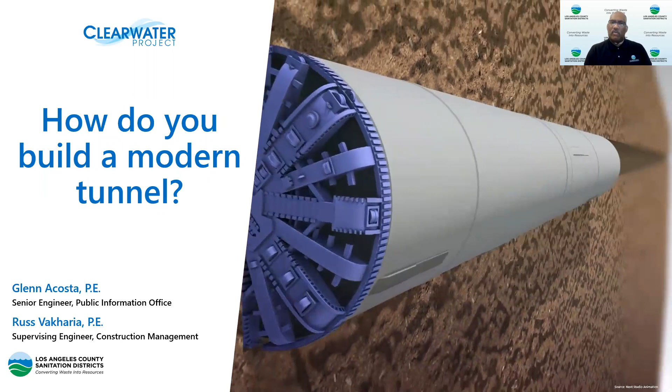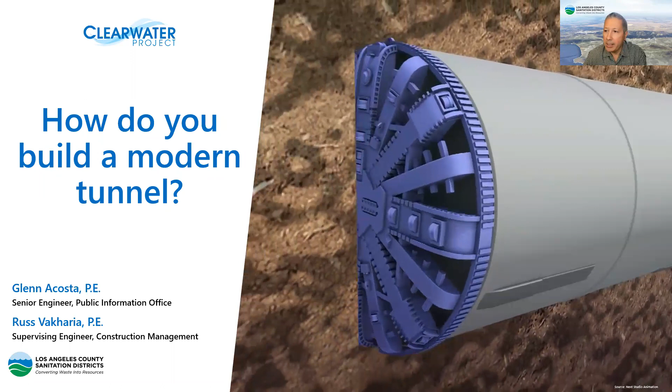Good morning, everyone. Thank you for joining us today for our presentation on how we build modern tunnels. Before I hand it off to my colleague, Russ Vakharia, who's overseeing the construction of the tunnel, I thought I would touch on who we are and why we're building a tunnel.

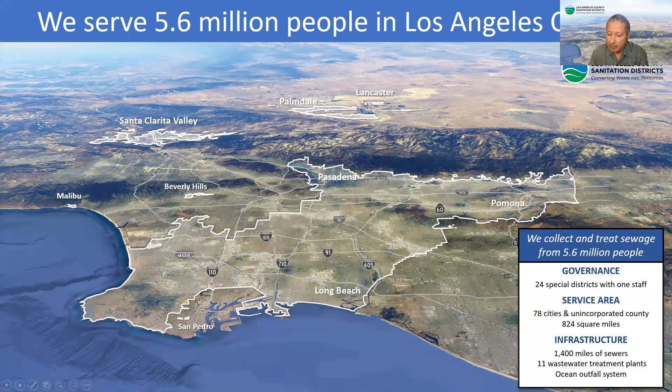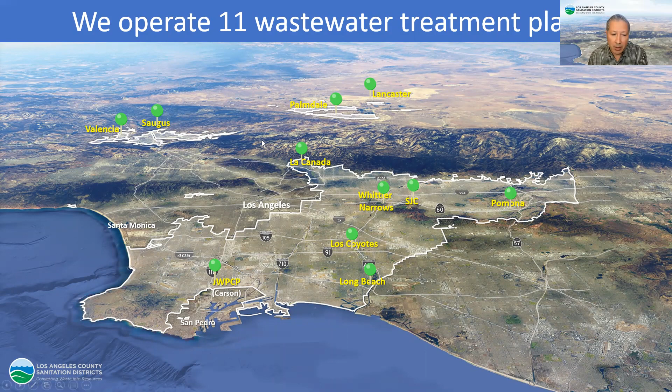Our agency, the Los Angeles County Sanitation Districts, manages the wastewater for over half the population in the county, 5.6 million people. Our service area goes from the South Bay all the way to the Antelope Valley. We manage the sewage by directing the flows to our 11 wastewater treatment plants, shown here in the green pins. Our largest plant is in Carson, called the Joint Water Pollution Control Plant. It is the hub of the main sewer system that serves the southern half of the county.

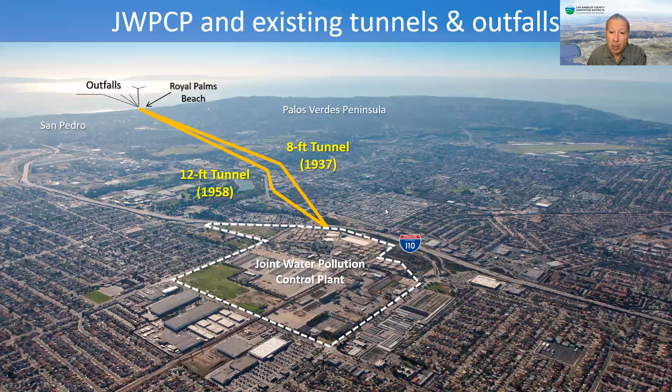Sewage flows into the plant, and in less than half a day, or 12 hours, it gets turned into clean water. That clean water goes out to the ocean through 2 tunnels that were built 60 and 80 years ago. These tunnels have never been taken out of service since they were built because there's always flow going through them, and they were not built to current seismic standards, even though they cross 2 earthquake faults.

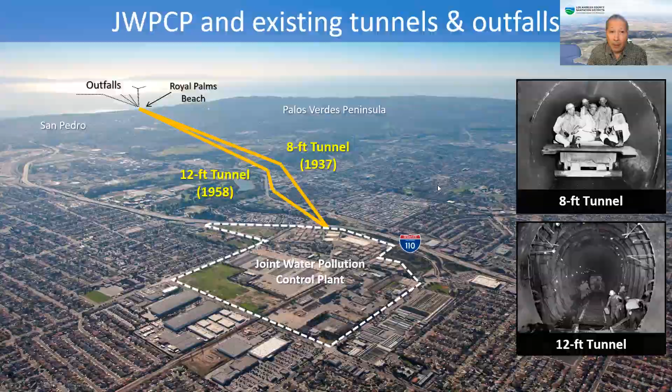The tunnels also have limited flow capacity, which comes into play when it rains across the LA basin. When it rains, rainwater gets into the sewer system, and the flows to the plant and through the tunnels can more than double. The last time we almost exceeded the capacity of the tunnels was back in 2017, when heavy storms hit the LA area.

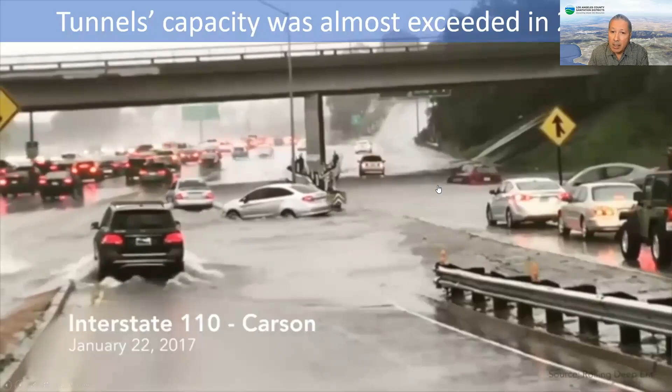So what would happen if the existing tunnels were to collapse or their flow capacity exceeded? Well, sewage would still flow into the plant, so we would have to find a way or a place for the treated wastewater to go, otherwise the plant would flood. And we can't allow the plant to flood because 5 million people and businesses across the county depend on this plant operating 24/7 without failure or interruption.

So to avoid the plant from flooding, we would have to release treated or partially treated wastewater into Machado Lake, which would impact the water quality.

Now, if that measure were not enough, we may have to go upstream and release raw sewage into the Dominguez Channel, which would flow into the LA Harbor and eventually to the surrounding beaches. Depending on the extent of damage, a collapse of the existing tunnels, and where it's located, this emergency discharge could last for weeks, months, or longer.

In keeping with our mission to protect public health and the environment, we're building a new tunnel so we can avoid that situation.

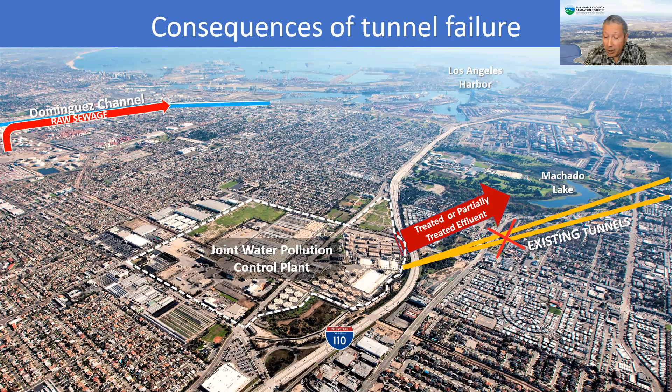So now to talk about how we're building the tunnel and where we are in construction is my colleague, Russ Vakharia.

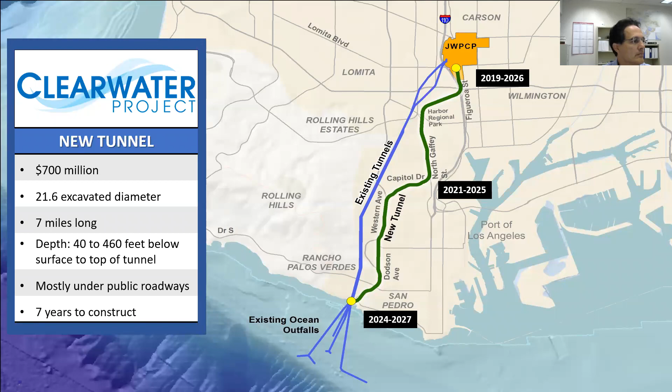Basically, the starting point for this tunnel is the tunnel shaft that we have, right on the border between Carson and Los Angeles. Here's an aerial view of the shaft area, and the tunnel machine was put down into this shaft and started tunneling in this direction.

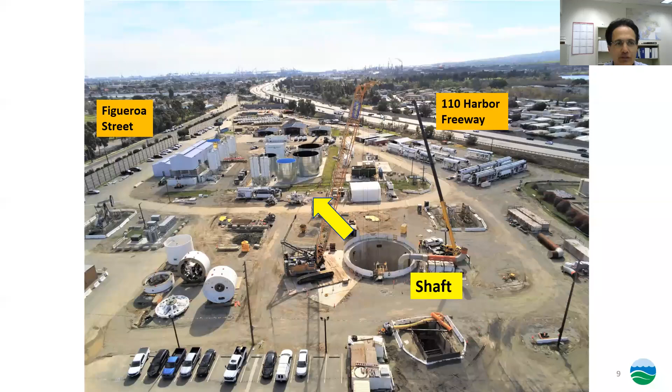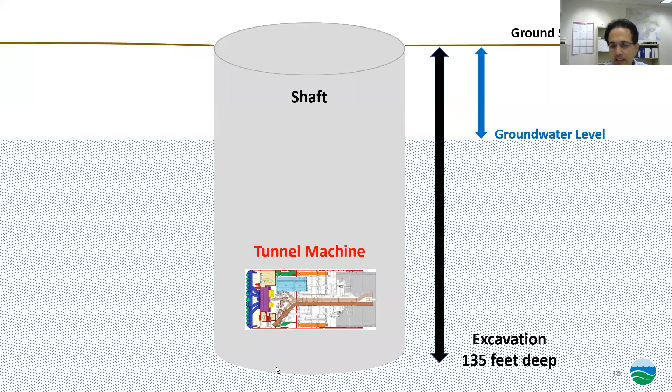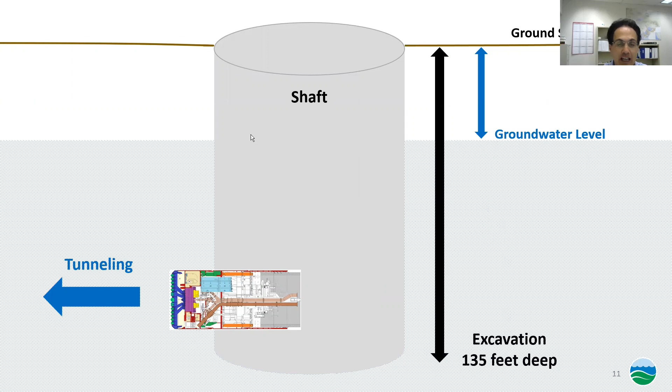Here you've got the Harbor Freeway and Figueroa Street. So again, the point of the shaft, and here's the ground surface we're talking about, and here's the shaft that was excavated some time back, is to place the tunnel machine down and start tunneling. As you can see, we're well under the groundwater level, which adds another level of complexity to this project.

So the route of the tunnel is basically going south out of the shaft onto Figueroa Street, then making a right turn, going through Harbor Park, under Machado Lake, up Gaffey, Capitol, and then Western. This shows the basic tunnel alignment, and you can see the streets that it goes through.

The first half of the tunnel is relatively shallower, 45 to 90 feet deep, plus or minus. The second half, where we go under the Palos Verdes Hills, is considerably deeper, up to 460 feet.

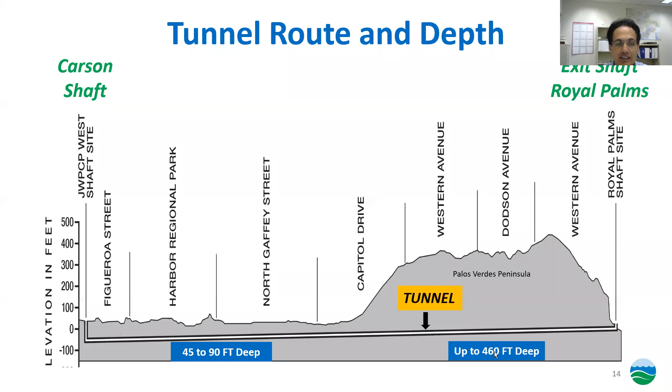The general tunnel machine, here's what the front of it looks like. It's about 21.6 feet in diameter. The whole head turns, and you've got various cutting tools here that help break up the material as it's tunneling.

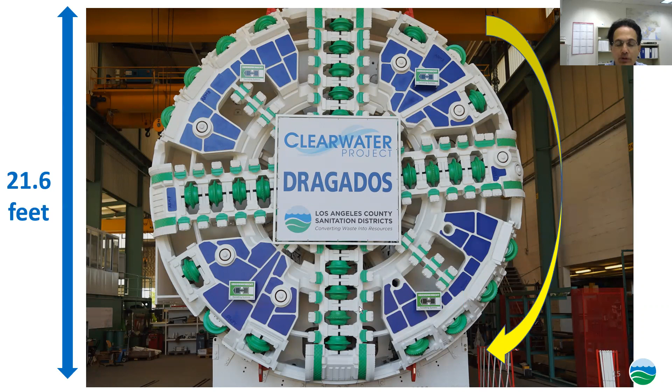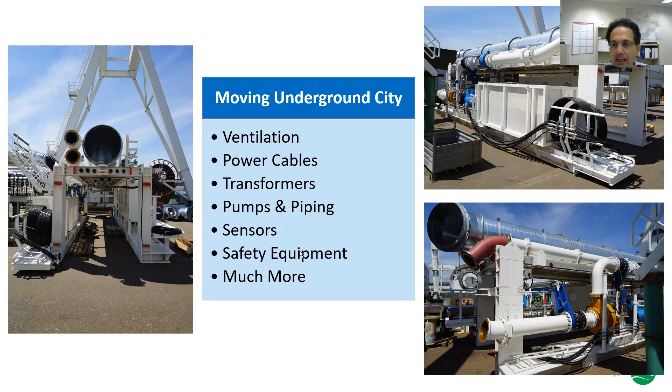Here's a picture of the tunnel machine. It was assembled in a factory in Germany where it was built. Here's the front of the tunnel machine, and here are the trailing gear pieces that it pulls behind. This trailing gear is made up of various pieces of equipment—it's like a moving underground city. It has to support the miners working in the tunnel machine and the entire tunneling operation, so it includes ventilation, power, transformers, pumps and piping, sensors, safety equipment, and much more. The front of the tunnel machine pulls all these pieces along behind it.

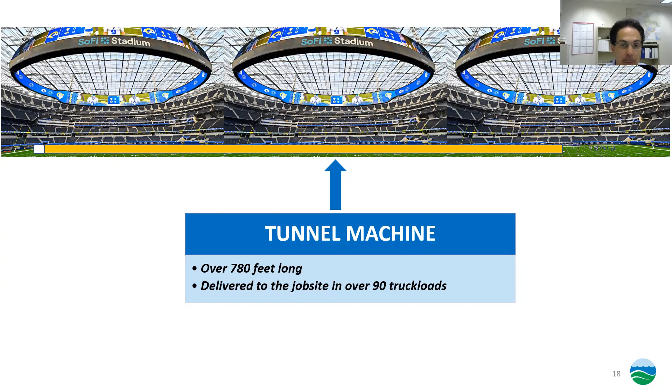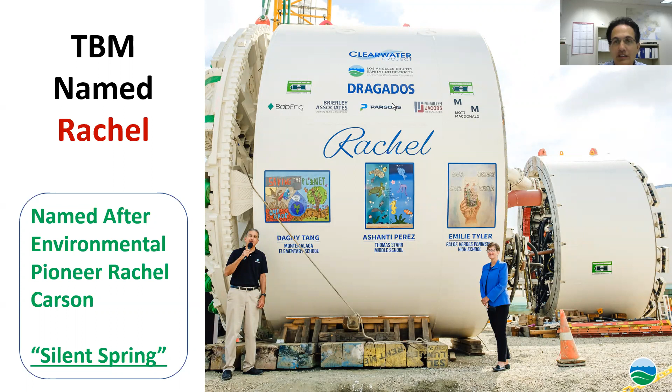The tunnel machine is named Rachel. We had an artwork and naming contest with the LA County Schools. It's named after Rachel Carson, an environmental pioneer who wrote the book Silent Spring back in the 60s. Here's the side of the tunnel machine—you see the name Rachel and some of the winning artwork from kids in local schools put on the side of the machine, along with the logos of some of the firms involved in this project.

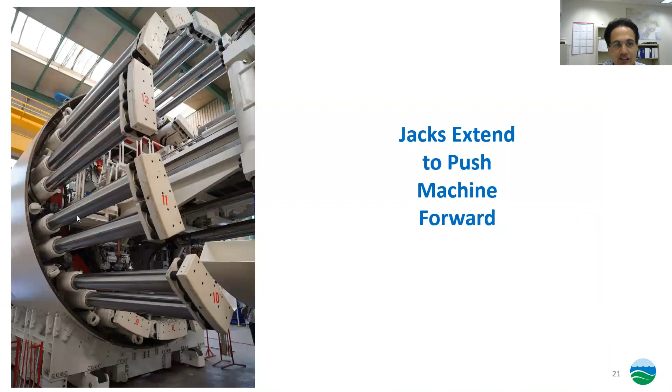So the way this tunnel machine moves forward is it's got 16 pairs of jacks, and these jacks are extended, and it pushes the tunnel machine forward. So here's a little basic animation as to how the tunnel machine works. The rotating head turns. The machine is pushed forward by these jacks who push against the last erected segment ring.

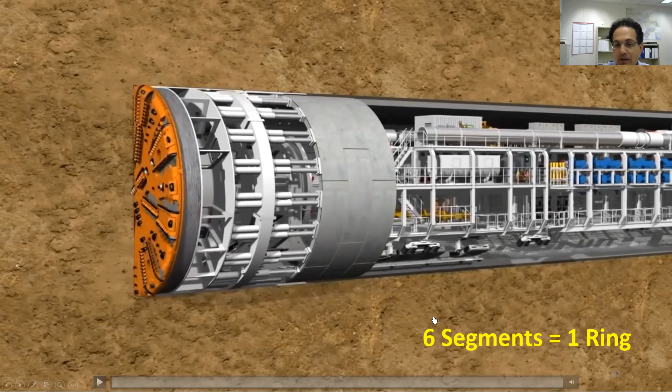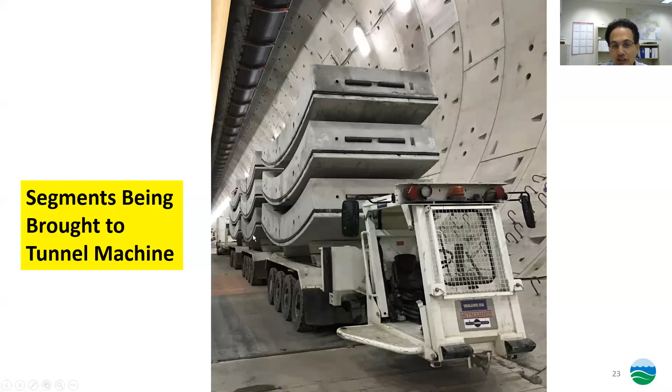So you see the jacks are pushing forward, then they retract, and then inside the tunnel machine, a new precast concrete ring is erected, and then the tunnel machine pushes forward on those. And that's sequentially how it's done. And each one of these rings is made up of 6 different concrete segments. These segments are produced in a plant in Palmdale. They're brought to the site, and then they're brought to the tunnel machine using rubber-tired vehicles like this.

In general, the way the tunnel machine works, and this is called a slurry TBM, is here's the outside, the dirt area, the tunnel machine's going from right to left. Here are the cutting tools. So there's a pressurized chamber here where a bentonite clay slurry mix is pumped in and kept under pressure. And this pressure is to equalize the external pressure so that you don't have any kind of ground movement.

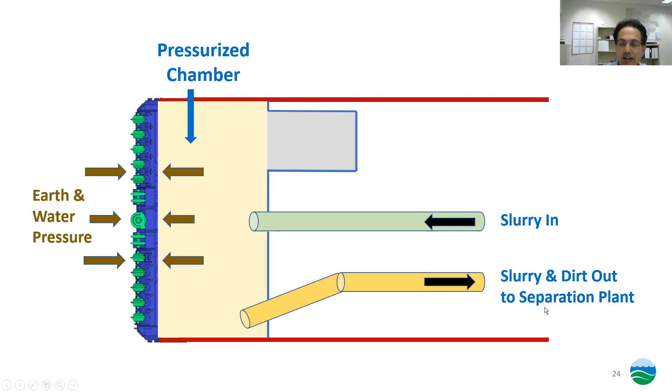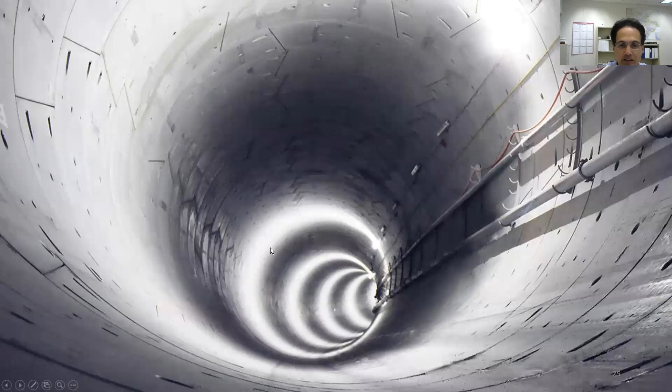And then as the tunnel machine digs, dirt comes into this pressurized chamber, and then a slurry and dirt mix is removed from pipes, and it's taken to a separation plant where the slurry is recycled and then pumped back in to use. So this is a picture of a similar tunnel, and this is what a tunnel looks like once it's constructed. And I'm going to show you some actual pictures of this job coming up.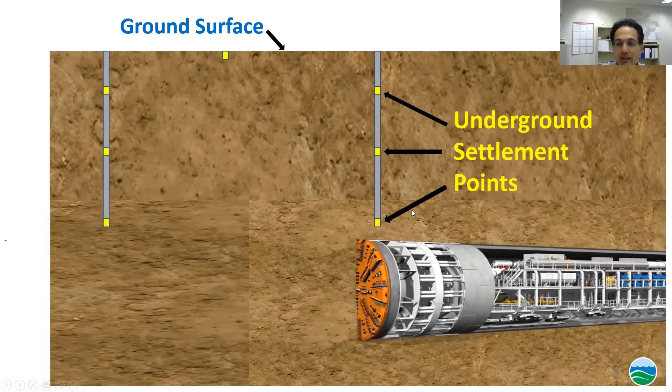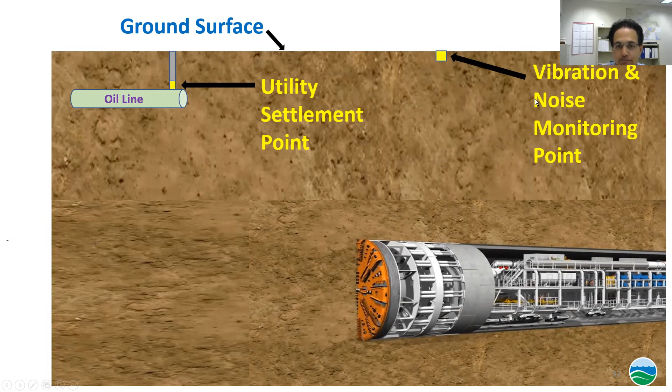So for example, this one, you see the 3 points in yellow, one's right above the machine, one is halfway up, and then you've got the third one. So we're monitoring these also in real time. So if there's any kind of movement, we get notification right away. We also have utility settlement points on critical utilities and vibration and noise monitoring points to monitor the machine. So we've got a series of these points, the underground points, the ground points, structure points, and all these are read wirelessly by these total stations.

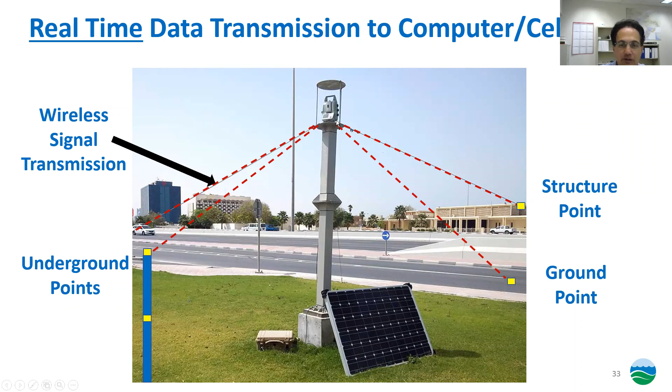And then the signals are sent directly to our cell phones so we can see exactly what's happening in real time. So this is an actual screen from my cell phone. And here you've got the tunnel shaft. This shows a graphic of the tunnel as it's been constructed. Here's a graphic of the tunnel machine. And these white points are the ground monitoring points. So we can see this in real time. I can see it on cell phone, computer, whatever. And all this data is transmitted in real time so we can see what's going on and make any adjustments as needed.

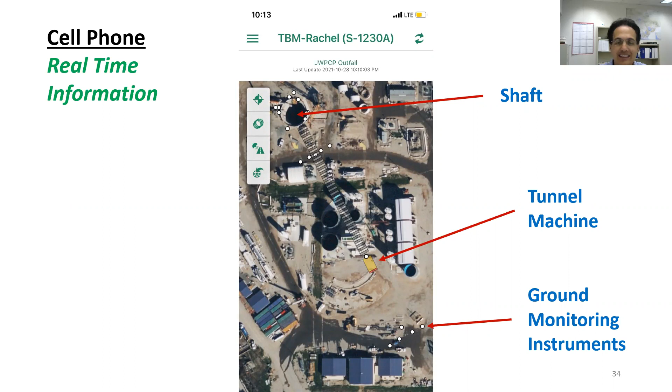The other thing, aside from monitoring the ground, is monitoring the tunnel machine itself while it's tunneling. So here's one of the screens that we have. Here's a cross section of the tunnel machine here. So I can look up here at any time and see, is the tunnel machine advancing, which means is it digging? Or is it building one of the concrete rings? Or is it waiting? And there are various other parameters we're watching also using this tunnel software.

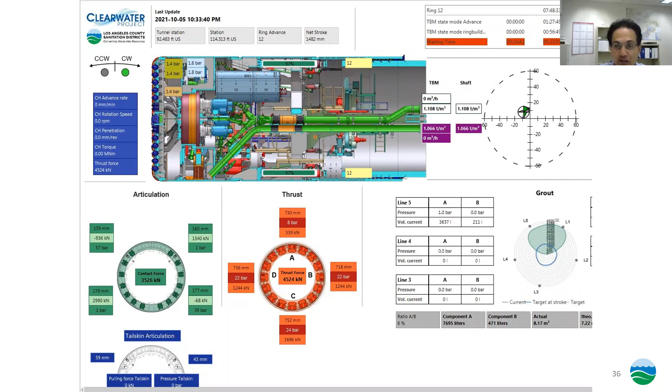So the contractor has access to this. We, the district, have access to this also. And again, this information is available constantly to us when the tunnel machine is operating. And the way this works is there's a fiber optic line that connects the tunnel machine to a computer server in our field office. And this is transmitted instantaneously to our cell phones and computers.

And all sorts of different parameters are being monitored, including the amount that's excavated, how much thrust force is being used, if the cutting tools are wearing, pressure, and more.

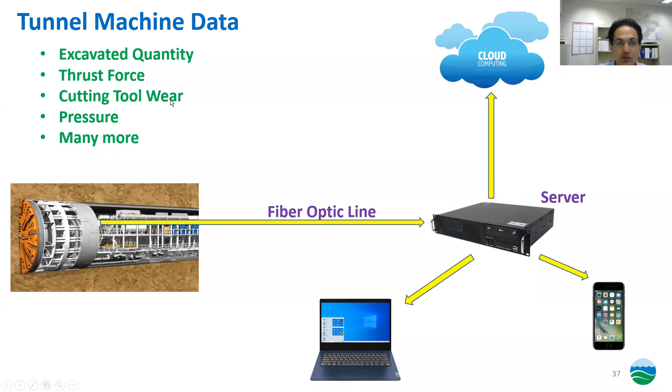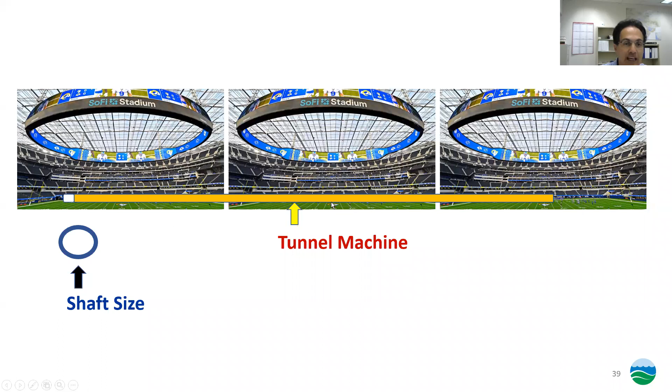So the first part of the tunneling is assembling the tunnel machine in the shaft. And again, as I mentioned, this tunnel machine is approximately this long. It's over 2.5 football fields long. The challenge is you've got to get this long a tunnel machine into this small a shaft. If you had a bigger shaft area, you could assemble the whole machine on the surface and put it down. But here you've got to put it together as you're tunneling.

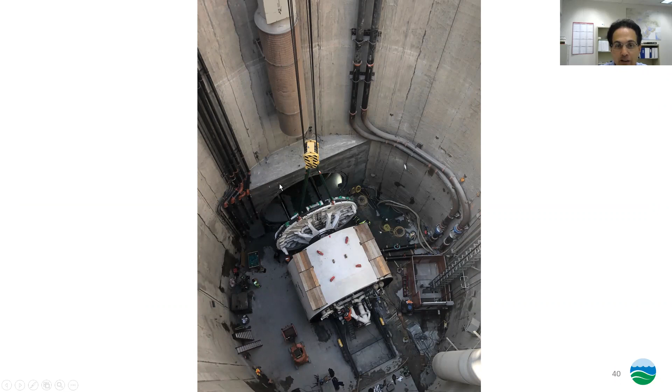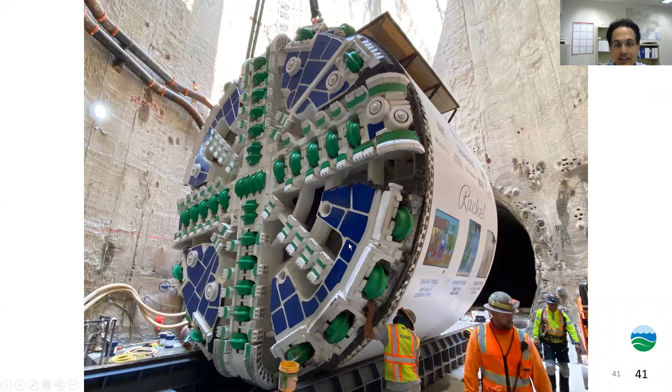So here's an actual picture that was taken some months ago. We're looking down into the tunnel shaft. Here's the front cutting head of the tunnel machine, and here's the second piece. You've got a short starter tunnel here. So basically, this is the tunnel machine down in the shaft, looking at it. Here's the cutting tool. You can see the name Rachel with the artwork here. And these are the tunnel miners getting ready to start the tunneling process.

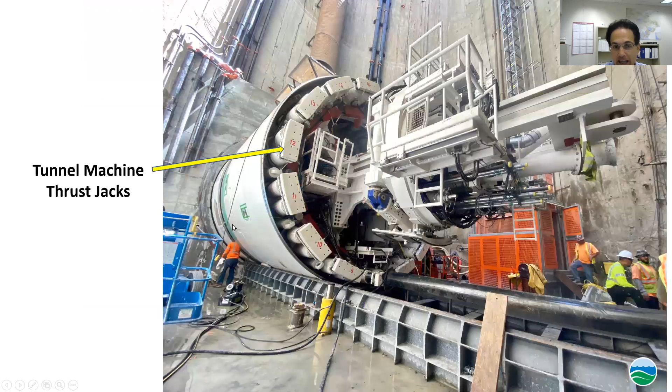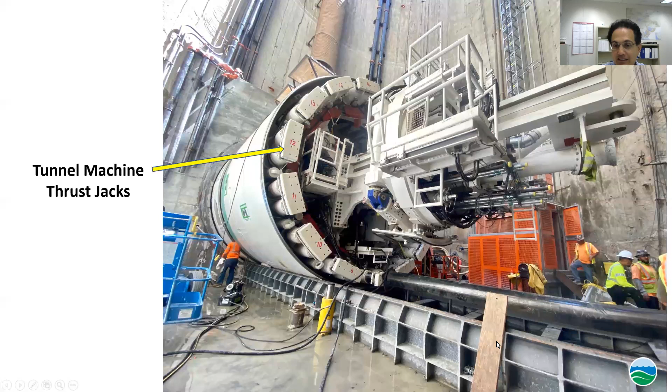And here we're looking at the tunnel machine from inside the starter tunnel. You've got these guide rails. So the tunnel miners get this machine into the starter tunnel and get it ready for mining. And here, the front of the tunnel machine's already been pushed into that starter tunnel. So you're looking at the rear of it. Here, we're inside the shaft. And here are the thrust jacks. Here's the guide rail. And this is when it was getting ready to start tunneling.

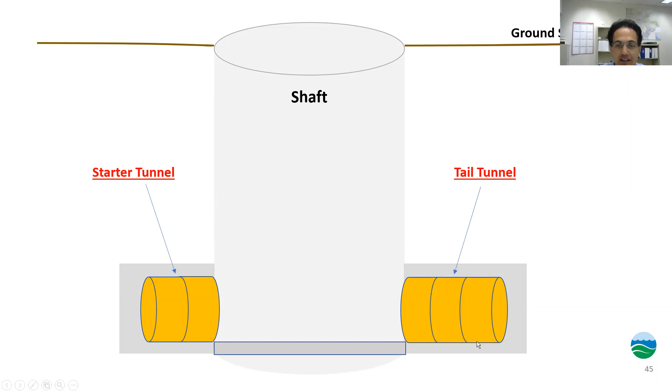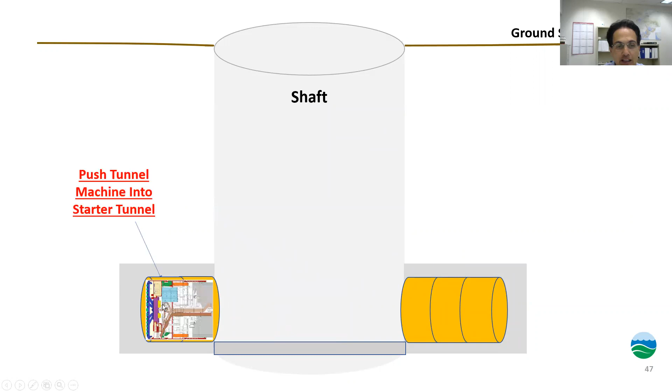So the launching of the tunnel machine, I'm going to show you a few graphics to show how it's done, because it's got to be done in pieces. So we have the shaft. Here's the ground surface on top. Here's the shaft. The contractor dug short starter and tail tunnels to logistically help launch and manage the tunnel machine. So the first part was lowering the front of the tunnel machine down, bolting it together, and then pushing it into the starter tunnel. Then they attached a piece of trailing gear behind it and bolted that together.

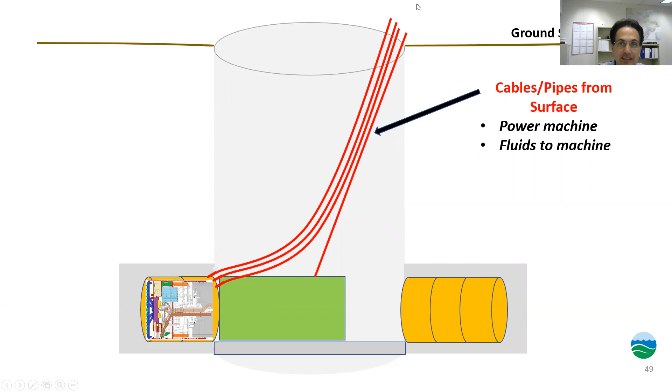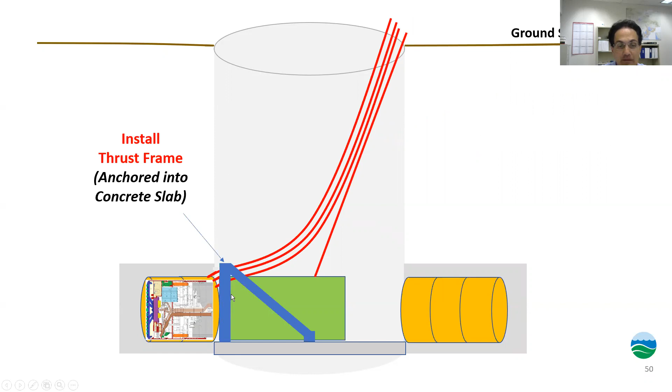And then they extended cables down from the surface, because in order for this machine to work, it's got to be connected to power, the slurry system, fluids, other things on the surface. And then the tunnel machine needs something to push off of. So a steel thrust frame was erected so that the tunnel machine can push off it and start tunneling. So the tunnel machine pushes off it, starts tunneling.

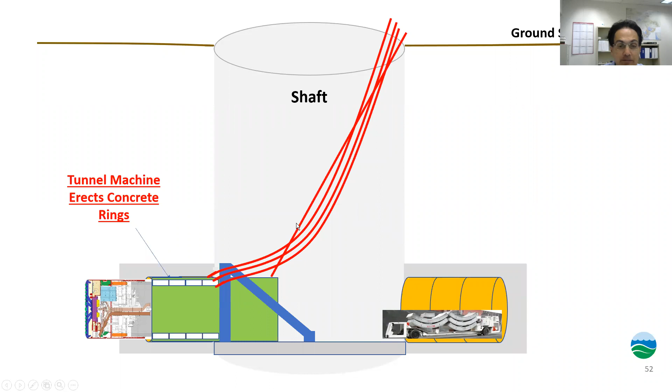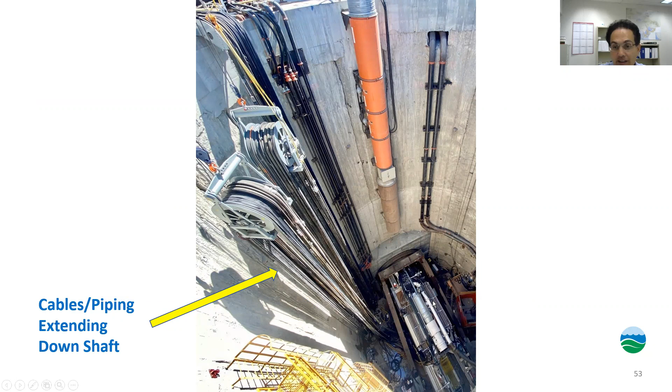So here's an actual picture that was taken several weeks ago. Here you see all the power cables, the pipelines and all going down to the machine. The head of the machine is already buried, and here's the first trailing gear piece. So this tunneling operation right now is being fed from the surface. Here's some other pictures from the shaft where you've got some tunnel miners. Some of these concrete segments are being lowered into the tunnel, and the miners get them ready to feed the tunnel machine.

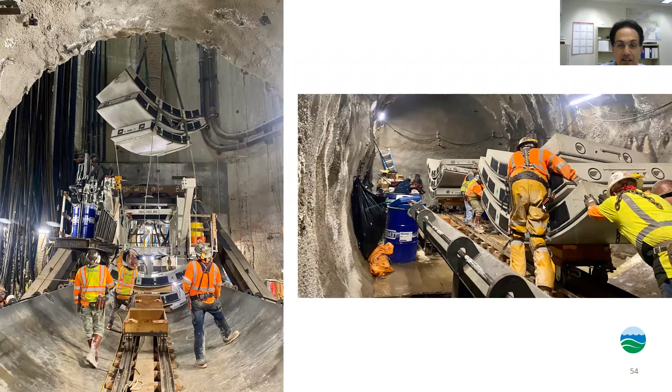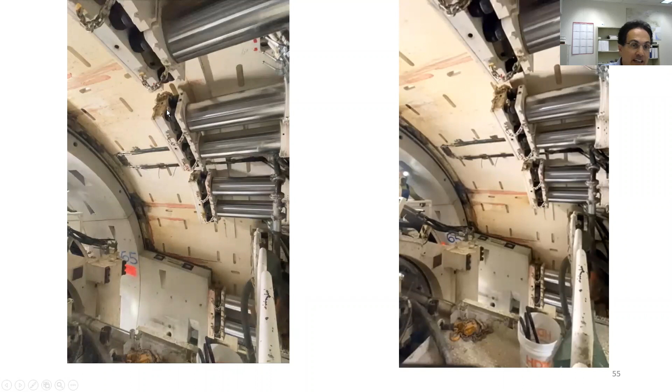On the left side here, this is an actual picture of inside the tunnel machine. So you can see that this ring has been erected. You see the different segments. Here's one segment, here's another one. And now a new ring is being erected here. And here are the thrust jacks. So the thrust jacks are extended back as this new ring is erected.

Here's a little video on the right that shows it. So you see the thrust jacks are pulling back, and now you see the tunnel machine arm raising up the next tunnel segment to put it into place.

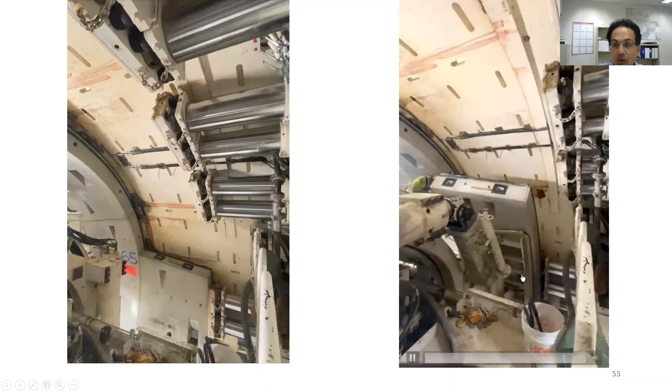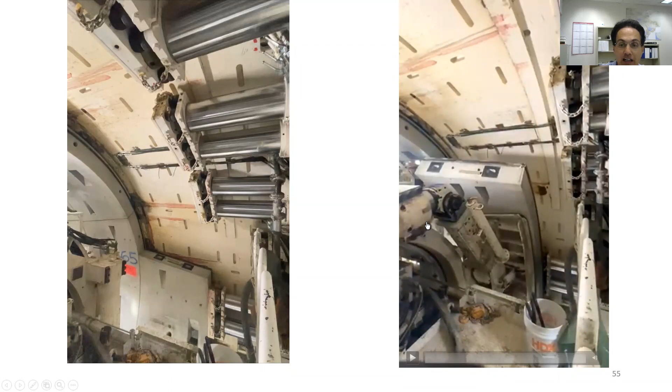And this is done sequentially by the tunnel machine as it moves forward. So once this ring is built, then these thrust jacks will press up against it and move forward. So these are, again, actual shots from the tunnel machine. And here's one of the tunnel miners bolting some of the segments together. The clearances inside the tunnel machine are very tight.

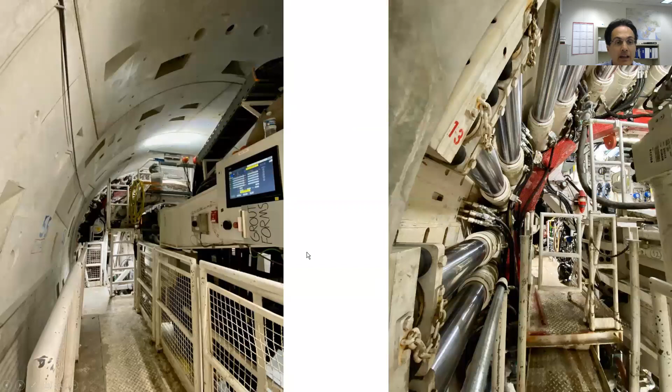And here's some additional pictures of the tunnel itself. So you've got the tunnel machine here. Here are some of the segments that have been erected in the tunnel as it's moving forward. And you see that after a segment is erected, these thrust jacks push up against the last erected segment and push the tunnel machine forward.

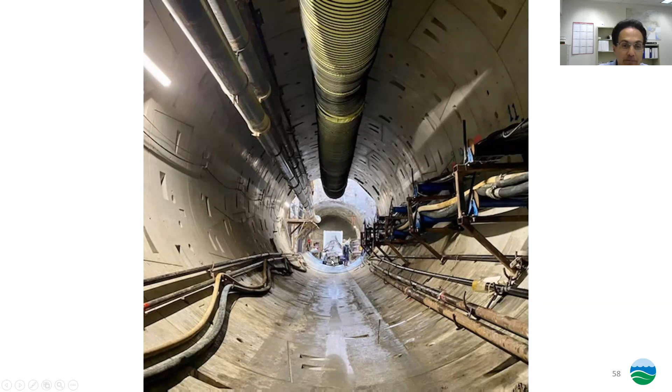And here's a picture of a portion of the tunnel that's already been excavated. We've gone over 350 feet at this time. It looks a little messier right now because all these cables are strung along the side to feed the tunnel machine. Once all the tunnel machine pieces are put in and the entire machine is hooked together, a lot of these cables will go away. So that's basically the overview of what's happened so far. If there are any questions, we'd be happy to take them.

All right, thank you, Russ. That was pretty fascinating. First question is how much did this tunnel machine cost to build? Now, the contractor purchases the tunnel machine, so we don't know the exact figure, but it's probably on the order of something like $20 million plus.

Okay, and the next question, we're going to allow Sire to talk. I think we will ask to unmute. So Sire, go ahead with your question. Good morning. Am I audible? Yes, we can hear you.

Okay, thank you. I just wanted to know, and I don't mean to be sarcastic, if Elon Musk and Tesla company is associated, because I did notice that there was some connection between Amazon and the Clearwater project. No, Musk and his tunnel company are not associated with this project at all. And Amazon's not associated with the Clearwater project as well. It's a project we've been analyzing at our treatment plant since 2006, and it's something that we need to do because the existing tunnels are over 60 years old. So it has nothing to do with Elon Musk or Amazon. Thank you for your question.